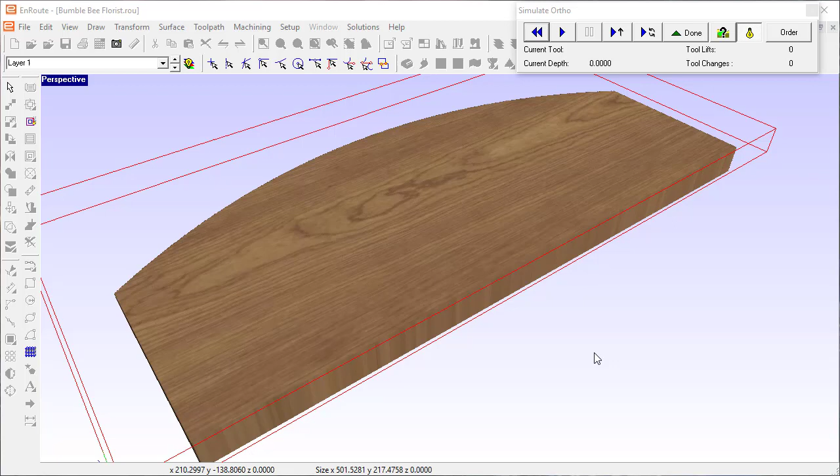One of the most interesting and simplest ways to toolpath a job is to use a conic tool or a tapered tool to do a 3D engrave or a 3D clean pass on some toolpaths. There's lots of applications for this. This is a pretty simple example, but there's lots of other applications in woodworking, cabinet making, and sign making. It's a fun way to create really interesting toolpaths.

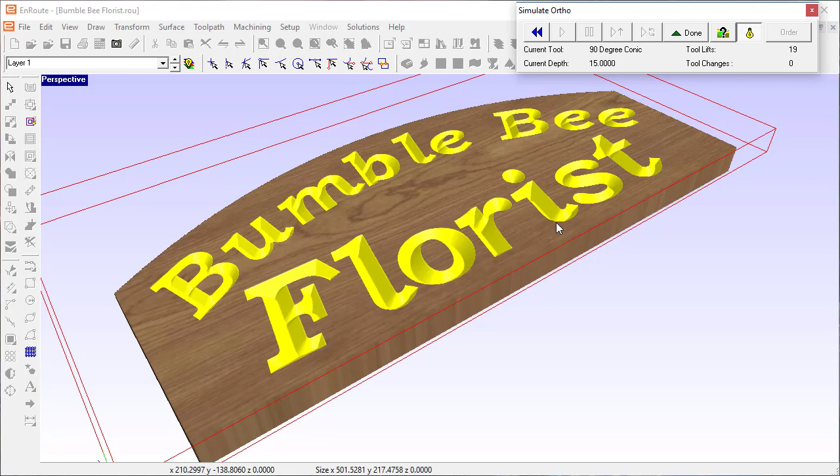One possible issue is that if you get a new tool or one you're not as familiar with, you need to make sure the angle you specify for the conic tool is accurate. Even though it says it's a 90-degree conic with a 45-degree angle on each side, that may or may not be true. So you might need to calibrate the tool, meaning create some test cuts to make sure you know what the angle is, to get nice crisp corners and good results in EnRoute.

So I'm going to move over to a simple little file here, which I'll use as an example of how you might create a calibration file, and then we'll look at some results I did for calibrating a tool—not a new tool, but one just to verify the angle was correct.

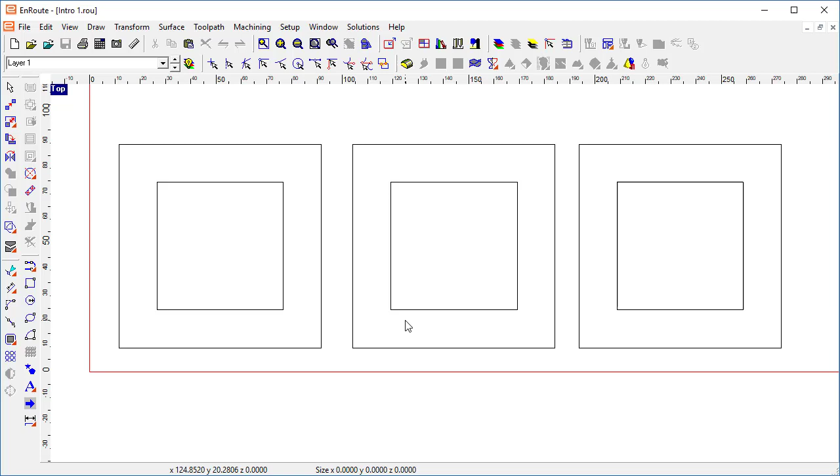If I've got a tool defined, I most often would start with the advertised angle, what I think the angle is. In this case, a 45-degree angle. We specify half the total angle of the tool, so a 90-degree conic would have a 45-degree angle there.

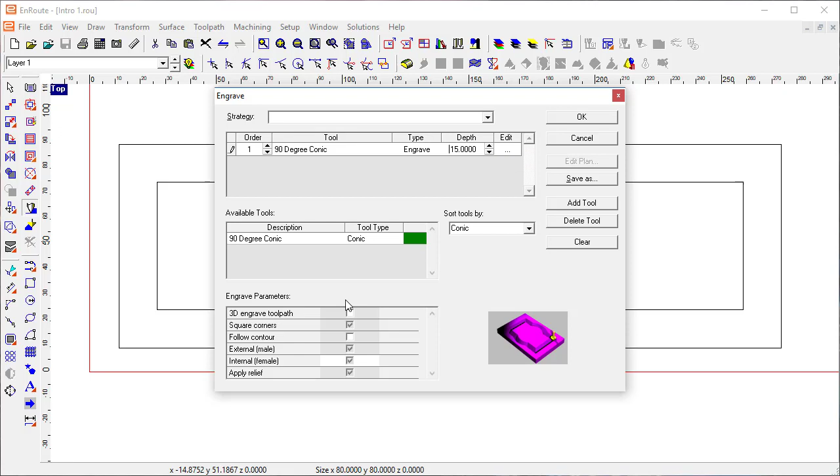So if I create a real simple engrave toolpath using that tool... I'll click OK, and you see the toolpaths that get created. This is what I would expect to give me nice sharp corners and very accurate outlines both inside and outside, to make sure I get really good results.

Sometimes when I cut out using a tool like this, if my definition doesn't match the tool, I get some really odd results. So let's look at the range of results you might expect for a tool that hadn't been correctly calibrated.

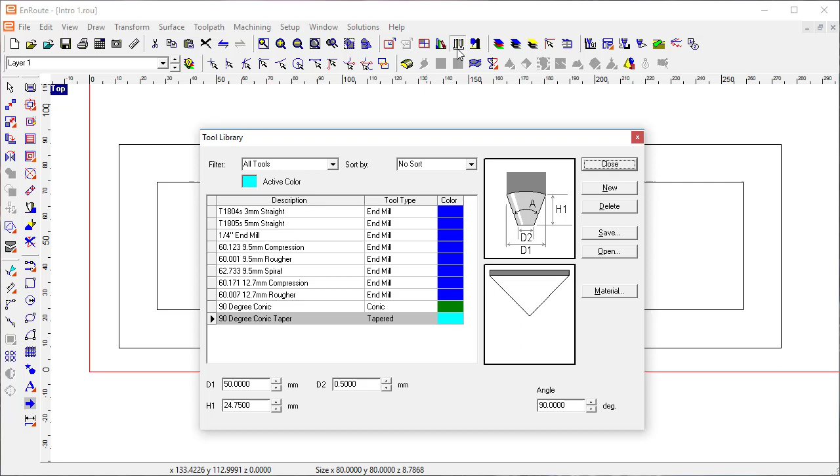To do that, I can go into my tool definition for a 90-degree conic and change that angle. I'm going to make it 40 degrees—quite a bit different than what I would expect. Now I can create the same toolpath using that same tool, but now with a 40-degree angle instead of 45.

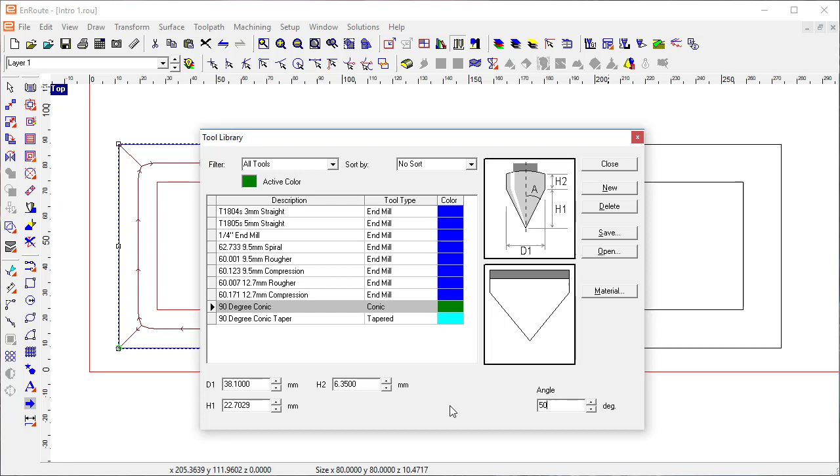This toolpath was created with that 40-degree tool. Now if I go in and change the definition of that conic again, I'll make it 50 degrees—5 degrees on the other side of what I think the angle is. And now if I create an engrave here...

These toolpaths are all very similar. Just glancing at them, it's pretty hard to tell the difference, but they actually do have differences as far as what EnRoute used to calculate these toolpaths.

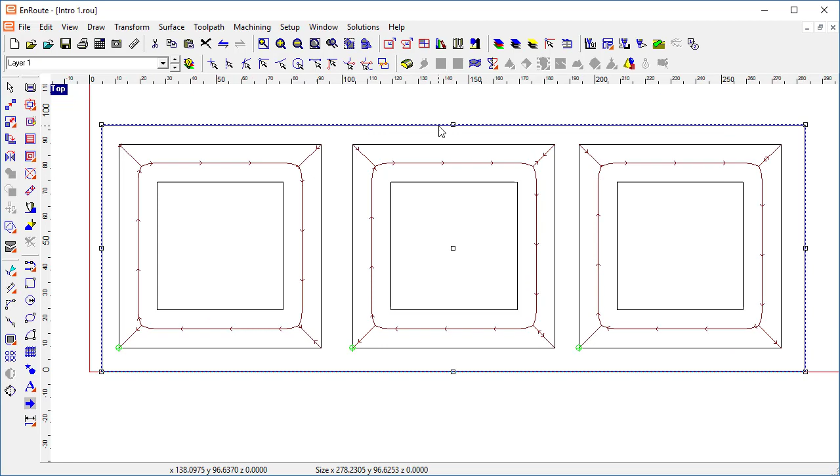Now if I change my tool back to a 45-degree angle, let's do a quick 3D simulation. I'm going to draw a rectangle to simulate, click 3D simulate, go back to no texture, and for my selected color I'll use orange—that's my favorite way of doing it. So now if I simulate this...

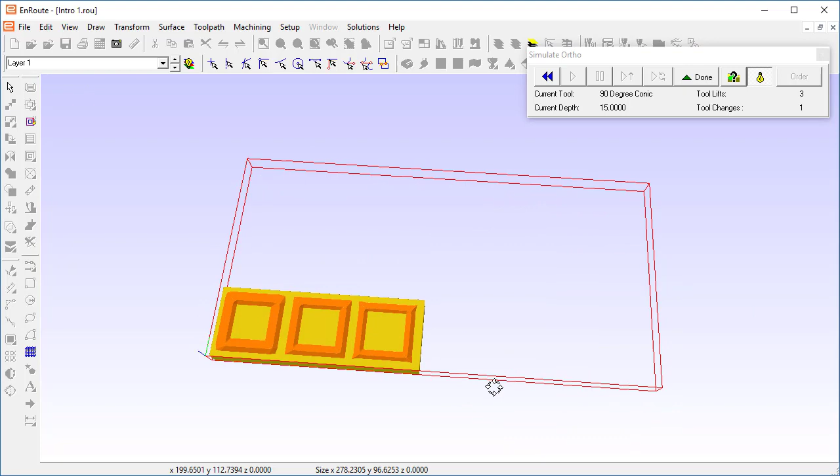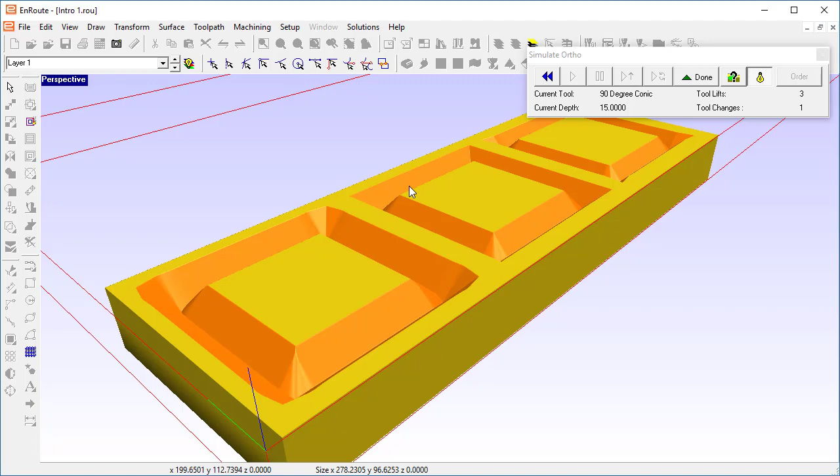You can see I get a simulation that gives a pretty good indication of what the actual engraving would look like if I used the same physical tool for all these toolpaths. This toolpath was created with an 80-degree total included angle, this one was 45 (a 90-degree angle), and this one was 50 (a 100-degree angle). That's the range of how far off I might really expect to be.

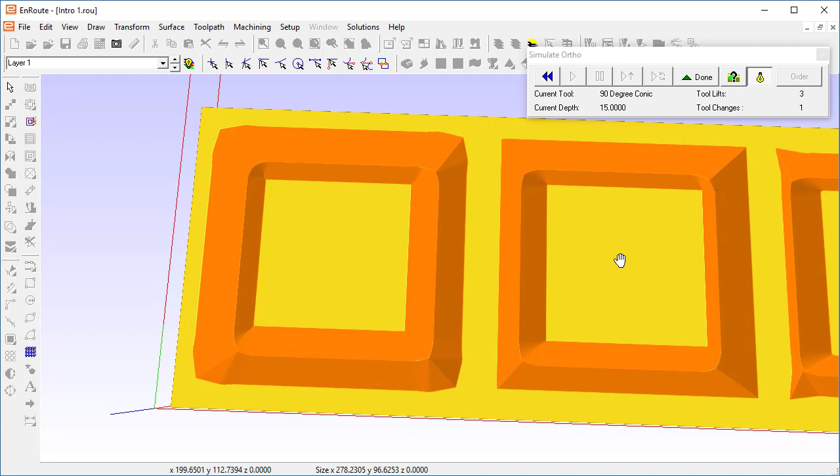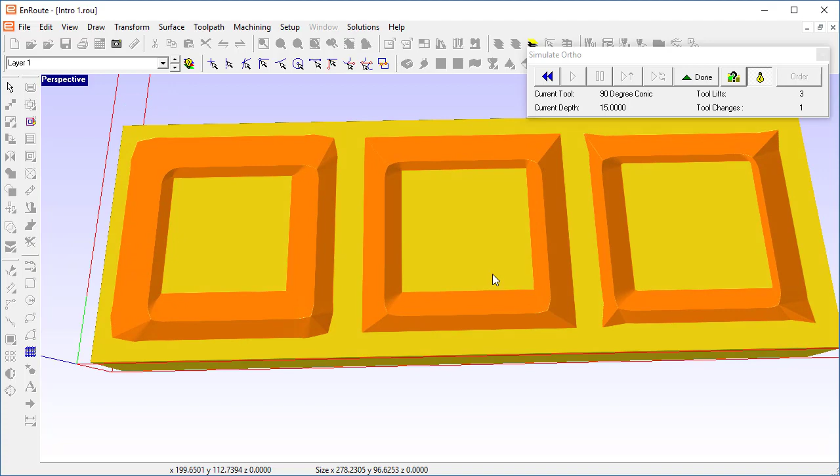You can see what the toolpaths look like. If EnRoute thought the tool had a smaller angle than it actually did, when I go up into the corners I get this bowing out. And if EnRoute thought I had a larger angle, a little flatter tool, then the toolpaths end up with this bowing in on the inside. That's the results I'd expect on one end of the spectrum or the other. As I get closer to the actual tool angle, I get closer to the nice crisp corners I'd expect.

So let's look at a file I created.

So this is one that I created that I actually cut out. You see what I did is I wrote the actual assumed angle in here, and this is what I created as far as a range of angles, giving me a nice range. So if I assume the tool is a 45-degree angle, I went all the way from 40 up to 51 in 1-degree increments, and as I got closer to 45 on this top row, I went in 1/10 of a degree increments as a way to really get a sense of what this tool might look like.

Now, the one thing that's slightly different with this particular definition, and I'll show you a photograph of my tool, is my tool actually has a slight tip dimension to it, so it doesn't come down exactly to a point. So what I did is I defined a tool that I called a 90-degree conic taper that had a 0.02 inch or approximately 0.5 millimeter tip on it, and that's the tool I actually used for defining this to take into account that slight tip diameter. So that's just a small change, and it's a tapered tool instead of a conic tool, but the effect I get should be more closely tied to the actual tool, because I'm taking into account the tip diameter.

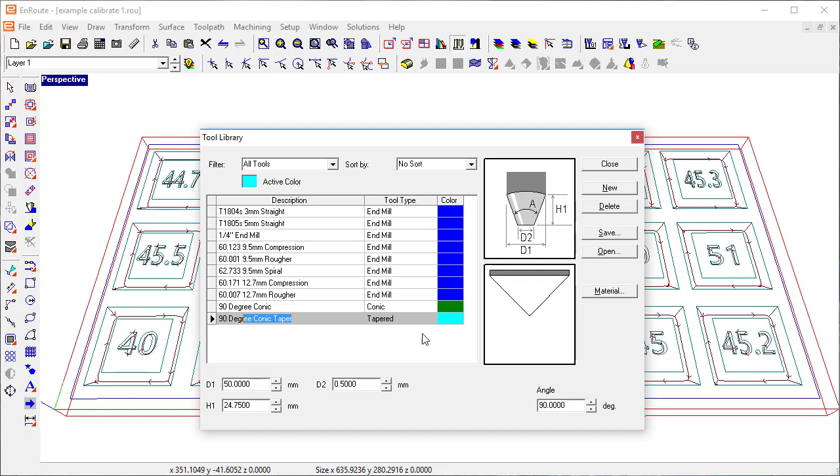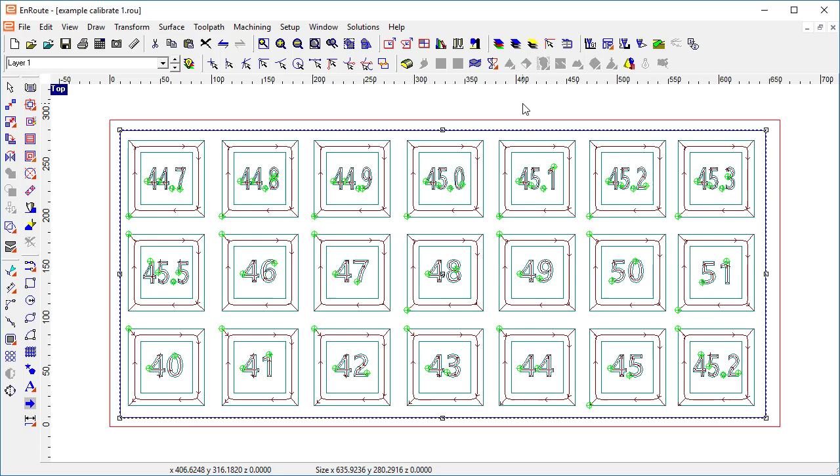So if I do a quick simulation of this, I've got sort of an outline here. Let's double check, that tool is defined in this case with the complete angle I define, a 90-degree angle. So now if I do a simulation, you'll see that I'll get sort of that range of results like I did in that other simpler file we looked at. It's a pretty nice preview of what I might expect to see when I cut out the piece.

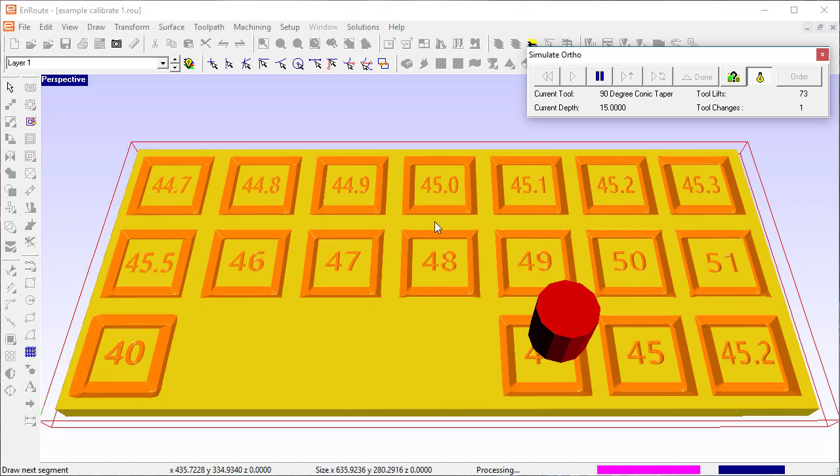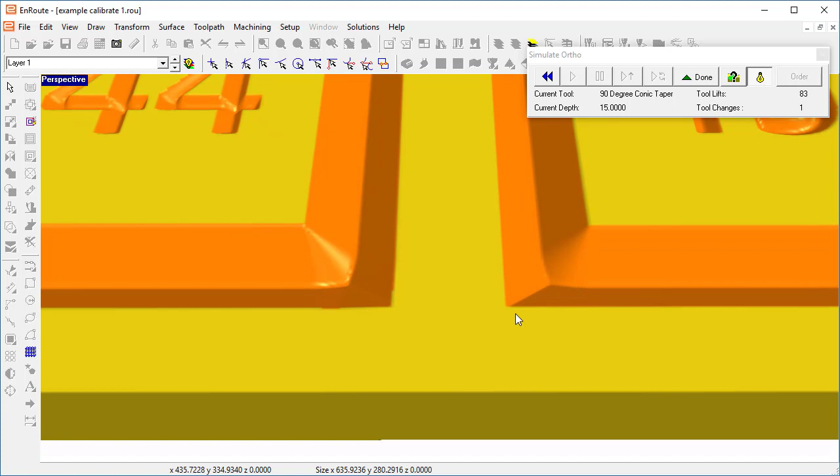You'll see at one end of the spectrum, the 40-degree angle, I get the thing bowing out, and as I approach 45 degrees, I get closer to the actual straight outline I'm looking for. You'll notice, because I do have a tip diameter, it's pretty small, but you can see there is actually a slight radius in the corners, and that's what I expect to see when I actually cut my job out. Then as I get into the higher end of my angles, the toolpaths bow in. So EnRoute will even do a pretty nice job of giving you a preview of what you might expect in terms of actual results, assuming your tool has a 45-degree, or a total of 90-degree, angle on the inside.

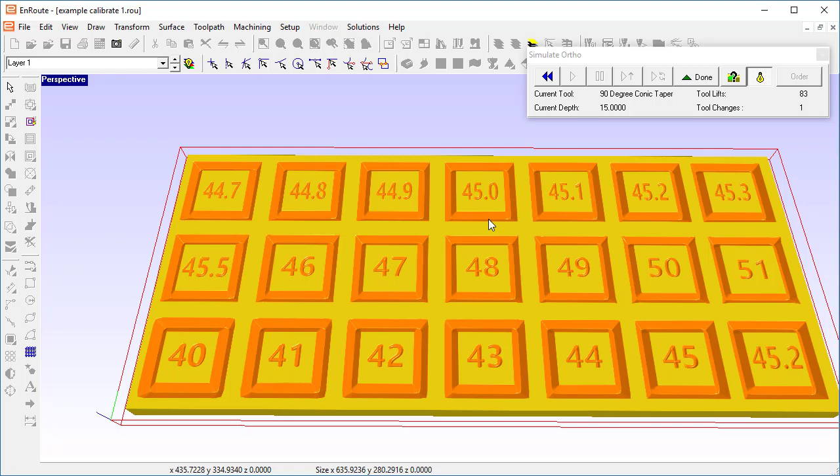So that's my sample piece. Now what I'll do is show some photos of my tool and photos of the piece that I cut out, along with a video of the piece actually cutting on the machine.

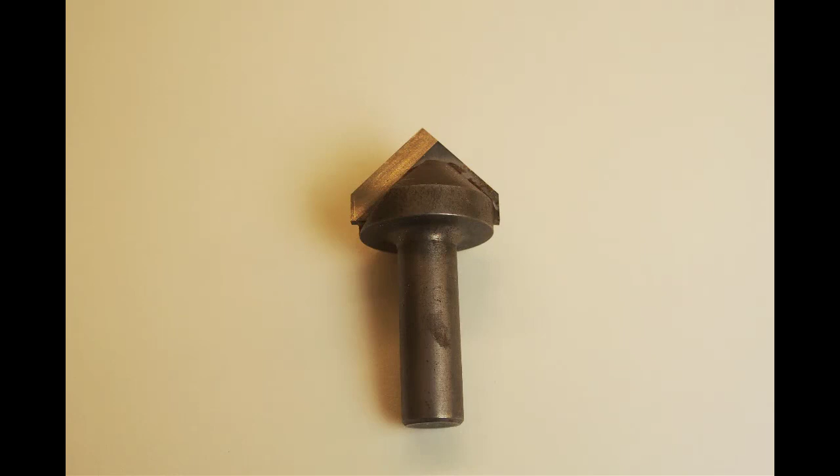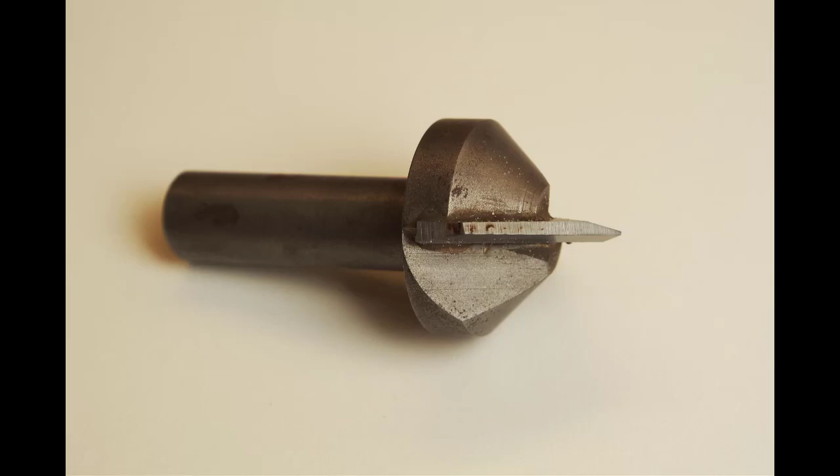This is the tool that I used to calibrate, and from this angle you can see that it looks like it pretty much comes to a point. When I rotate the tool by about 90 degrees though, you see that it really does have a tip diameter, and I estimated it at 0.5 millimeter, or about 0.02 inches.

Let's take a look at what the job looked like as it was cutting.